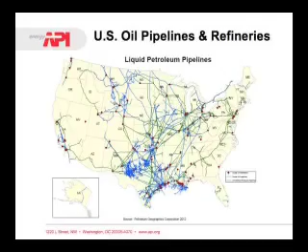There are new pipelines being built all over the place. I mean, you'll see with all of the new production areas that have come up in the U.S., we're seeing new pipelines being built, both gas and liquid. Really, the crude oil lines are coming from new production areas in the U.S., and they're really opening up new sources of supply for our refineries to produce the products that go into the products lines.

So pipelines are safe, and they're getting safer. That doesn't mean that we don't have a long way to go to get to zero. We're trying to get to zero, but the numbers, as we've looked at, are small as far as frequency. We're trying to get better.

Operators have dedicated fairly significant resources to ensure the safety of their systems over just the last few years, and certainly over the last 10 years, there's been a big emphasis on integrity management. The industry does track its safety and spill performance using a system that we call the Pipeline Performance Tracking System. This is, again, for liquid systems.

We collect data from about 85% of the industry, and as far as pipeline miles go, we do think that's pretty representative of our industry. It's not 100%, but what we want to do is learn from the information we're collecting. Over the last 11 years, there have been significant reductions in the number of spills and the volumes released from all the liquid petroleum pipelines. And over that same period of time, the number of crude pipeline releases have come down as well, and I'll give you some indication of that.

Recently, obviously, there have been some concerns about certain types of crudes coming into the United States from Canada, and we refer to as dilbit. Diluted bitumen and processed bitumen is moved by pipeline into this country. It has been for about 30 years or so. And one of the things we see when we look at the movement of that type of crude through pipelines is that it's been suggested there are some corrosion concerns with it. And we went back and looked at how much internal corrosion is happening in lines moving this diluted bitumen, and haven't seen any corrosion-related releases.

So DOT is going to take a closer look at this. They're going to produce a report on this. We think we know what it's going to say, but we want the science to speak, and so we're looking forward to having that report come forward.

Corrosion-related releases, which are the most common types of releases in crude pipelines, in this 11-year period we've been collecting data since 1999, are down by about 76%. We think that's largely due to integrity management that we've been doing over that time period, where we've run the smart pigs, the robotic tools in effect that go through the pipelines that detect anomalies, allow the operator to get to those anomalies and repair them. We think that's the main reason why these reductions have occurred.

Other areas that have been impacted by integrity management and other safety programs, we've seen that equipment failures are down by about 34%. We also see that weld failures are down by about 21% over that time period. And we very much realize that incidents are still happening, that there's more work to do.

Accidents that happen, incidents, near misses, all these things we look at are not things that the operators want to have happen. And we're learning from the things that do and trying to avoid those same types of accidents over time. We do work with our regulators, both at the federal and the state level, with our oversight agencies like NTSB, to do investigations and learn from what happened in those accidents.

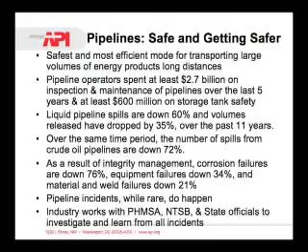Liquid operators, and this is all cut off, I guess, liquid operators do assess many more miles than required by the regulations. When we look at the regulations, they require that we do certain things when we're planning for construction, when we're actually doing the construction, for operations, for maintenance and repair, for training our personnel, for mitigating corrosion, for reporting. Those are all parts of the regulation that apply to every pipeline.

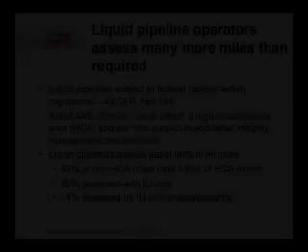And then there are some pipelines, about 44% of the liquid lines, that are in a situation where they could affect a high consequence area. And for those lines, there's an added layer of regulation that's known as integrity management. And integrity management plans apply in those areas where operators have to assess and repair anomalies that they find. What we did in 2010 was we said, well, geez, what are our members doing outside of the HCAs for those segments that don't impact HCA miles?

And when we looked at this survey, we had about 14 companies that responded to it that represented a little over half of the total liquid miles. And we found out that when we look at their data, they were assessing about 90% of all their miles, which is pretty comforting. They're not just limiting their assessments to the HCA could-affect segments. They're looking at 90% with some form of assessment. Now, this is not necessarily the Smart Pig assessment. Smart Pigs are used on about 80% of the lines with just Smart Pig assessment.

But we also use pressure testing, and we also use something that's called direct assessment, which is another method for assessing damage. Direct assessment is not used in our liquid pipelines quite so much as on gas pipelines for various reasons, but between those three assessment methods, we're getting about a 90% coverage, and 83% of those non-HCA miles are actually being assessed at this point, and 80% of those overall are being tested by Smart Pigs.

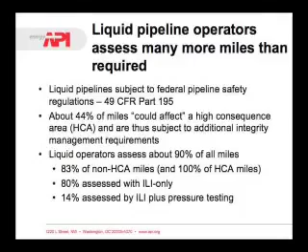That gives you a feeling about what we're doing. Liquid pipelines do strive to do more. Carl mentioned the Bellingham accident, and that was a seminal event for liquid lines because it was a gasoline pipeline. It made our industry stand up and say, well, geez, we have to do a better job. So one of the things that we did starting in 1999 was to create that database I mentioned earlier.

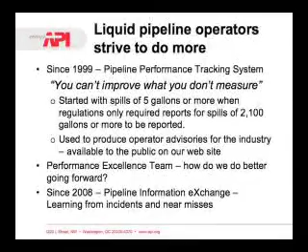And based on the premise that you can't improve on what you don't measure, we started collecting this spill response data. We were collecting data on spills of 5 gallons or more or any spill to a water source when the regulations really only required that spills of about 2,000 gallons or more be collected. Now, thankfully, the federal reporting has kind of caught up to that, and they use the same cutoff.

And it's part of the reason why Carl's slide earlier had a lot of those hazardous liquid releases, because we have a volume cutoff that the gas guys don't need to look at. And it's an appropriate cutoff because our products, our crude, our gasoline, our other liquids, when they release into the environment can have a significant impact, as you all know who live in this area.

So that's what we've done, and we use that information to learn and to produce advisories to the entire industry so that people can learn from the incidents that have happened before, hopefully avoid having those same kind of accidents. And later at the end of my presentation, I have a list of links where we put those advisories for operators to look at, and they're there for our regulators and the public to look at as well. And they have basically some considerations that the operators should think about when they're looking at that particular type of topic.

We also formed shortly after that a performance excellence team in our industry that's staffed by a number of very senior operating personnel that look at ways that, looking forward, we can improve our performance. And it's worked hard on things like excavation damage prevention. And one of the things that came out of our performance excellence team was this pipeline information exchange, which is a learning session for operators that have incidents and near misses.

And they actually come to a session. We close the door so we don't have members of the press. We don't have the lawyers in the back of the room. They have a safe way where they can talk about what happened in their accidents. People can learn from that. They can hear about what happened leading up to the accident, what they found in the accident investigation, what they put in place to fix that. Again, with a thought that just because this accident happened, we don't need to see it happen again, and we're going to share that information across the industry.

I mentioned here, we work hard on excavation damage, and I don't have it here. It's on my other coat that I've been wearing this week. But how many people here are familiar with 811? It's a good number, some not. But 811 is the national call before you dig number, and that's the number you want to call when you're getting set to do excavation or someone is getting set to do excavation on your behalf. You really ought to call the 811 number and get your area where you're going to excavate marked for underground utilities. So that's my pitch for 811.

In April, we kick off Excavation Damage Prevention Month, and it really is a month to focus on as we get into the spring and everybody's getting ready to do their planting. We want people to call that.

One of the things that we've looked at is we've got these safety issues that we've been addressing for 10 years, and I'm going to show you some data in just a short while. The data has come down dramatically in 11 years, which is the good news. The bad news is things are kind of tailing off. We kind of feel like, well, maybe we've picked the low-hanging fruit, and we're trying to look for the next beneficial thing to do. Our executives that work with our association and also with the Association of Oil Pipelines that we work very closely with came up with 7 new safety initiatives that we started this last year to try to improve things that we're doing.

Improving R&D and focusing our efforts more on the things that are the most important, putting more money on those things, and really pushing forward to get better results quicker. A lot of our research has looked at a broad range of things, and while all those things are important, we think we need to focus in a few areas of focus that will really lead to that kind of step change we're looking for.

Strategic planning. I mean, everybody should be doing strategic planning, of course, and we do a good amount of that, but we want to improve our planning to make sure that we're focusing our efforts to get the best bang for our buck. And then finally, external communications. We want to talk to people and tell them what we're doing, of course. Here I am talking to you today. But we also want to hear back from other groups, from other stakeholders, what we could be doing better. And we're trying to put some mechanisms in place where we can do that.

So we're working with groups. We're certainly meeting with our regulators regularly. We meet with NTSB regularly. We talk with our regional directors like Chris. We talk with the other trade associations. We talk with Carl's organization and other public interests. So we're really trying to reach out and get as much information as we can, and we're looking for ways to improve that. So those are our 7 initiatives, and what I'm going to do is just talk to you.

There's this ANPRM that Chris mentioned on hazardous liquid pipeline safety. We have commented on that ANPRM and made a few suggestions. The first one really is based on the work we did on the assessments and non-HCAs. We realized that we're covering most of the liquid pipelines with assessments, but the requirement for repairs, especially immediate conditions, there's a whole number of conditions, but we think the immediate conditions are the real focus for all pipelines, because those are the most serious anomalies, the things that can really cause you a big problem. Since we're already looking at 90%, we think that the immediate repairs ought to be required everywhere, not just in the HCA segments. So we've commented on that. That's one suggestion we made to DOT.

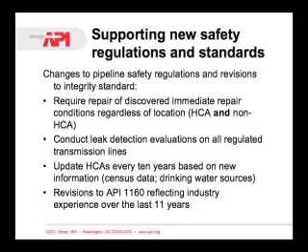And finally, point out down here at the bottom, we have a standard out that is our guiding document for doing integrity management on liquid pipelines. We're updating that this year. We're going to come out with a new document this year that'll suggest a bunch of changes. We're not sure if DOT will adopt it, and they might take parts of it and use it, but it really is a guideline for operators to direct them.

So, all right, I'm getting the hook here soon. I'm going to go through a couple more things. I don't have more than a couple more slides here, so I'll get through them quick.

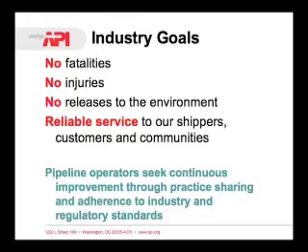These are the goals that we as an industry have adopted over this last 11 years and what we've been working towards, and that is no fatalities, no injuries, no releases, and reliable service. We do seek continuous improvement across the industry. And we understand quite fully that operating pipelines in this country really is a privilege. It's not a right. And our operators are trying to do all they can to live up to the public expectations for safe, reliable, and efficient delivery of energy products. That's really what we're about. These goals are all agreed to by our members and the members of AOPL, the executives that run those pipeline companies, and they are core to our industry safety culture.

I'm going to show you a little bit about the record. You've seen some of the DOT data that Carl put up, and I just put up these numbers. These are normalized per 1,000 miles, so it's normalized to the length of pipe. We started off in the first 3 years of collecting this data at about 2 incidents per 1,000 miles. And we've had a 60% reduction in that number to about 0.8 now in the last 3 years, including 2010. When you look at the volumes, we've had a 35% reduction overall.

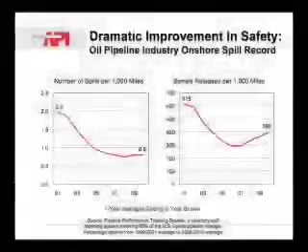What's not so pleasing is that little bump in the end that I think that Chris pointed out earlier. We've had a lot of major liquids releases in the last few years. Yours here in Salt Lake is not the least of that. They have really contributed to increasing volumes in this last year. And believe me, as an industry, we're looking at it and figuring out how we can drive it down. It's not something we want to see. We want to see these trends continue down and to the right. That's really what we're looking for.

When you look at the causes, again, our programs over the last 10 years, we started out with a large number of corrosion releases. And remember I said earlier, that's mostly associated with crude oil lines, and that's the truth. 132 incidents. Third-party excavation damage, that is by someone who's not associated with the pipeline operator in some way, was at 41, second leading cause. Then we had equipment failures, pipe material and seam weld failures, other types of incidents that kind of get lumped into that other category, operator error and natural forces. And natural forces are things like lightning strikes and floods and hurricanes, and locusts and stuff like that.

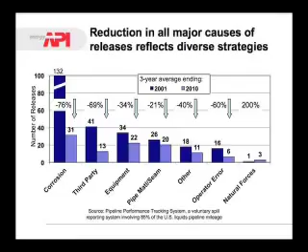So here's where we are in the latest 3 years. We've got a 76% reduction in the corrosion releases, both internal and external. We have an almost 70% reduction in the third-party excavation, which is great. It means that our damage prevention programs are beginning to really take effect. 34% down in the equipment area, and then down in almost all the other areas except for natural forces, because we've had a bunch of those hurricanes that have really impacted pipelines in the south and going up the East Coast, and we've had other types of incidents that have led to natural force damage.

One of the ones that I'll point out we're proud of is the operator error. We've had a 60% reduction. That's an area that the operator can affect and should affect, and we've been working on that particularly over the last several years. At any rate, that gives you a picture of what we're doing in the liquids industry.